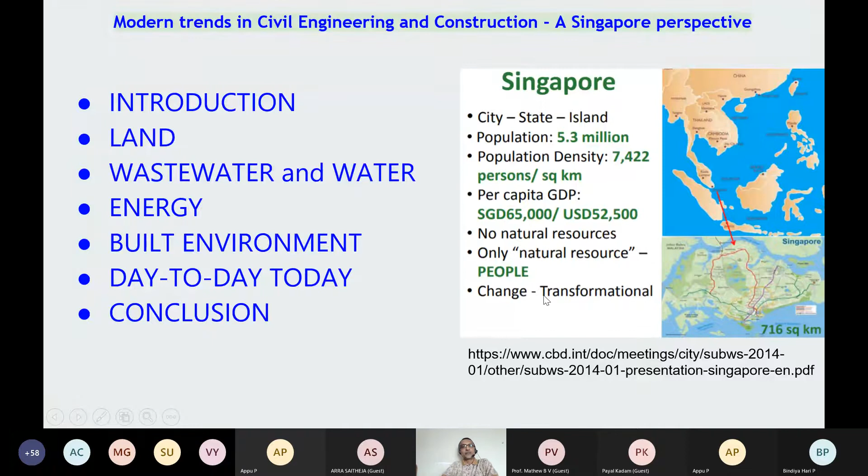You can see a barge coming in. This barge goes inside, it dumps all the waste from the mainland. It is segregated and then it is filled. See here, all these are filled long progressively - somewhere the vegetation is there, it was filled long time ago. Here, the black area is the filling in progress. Later on, this whole landform will be filled, and we don't know whether it will become industrial land, residential land, or a mixed development.

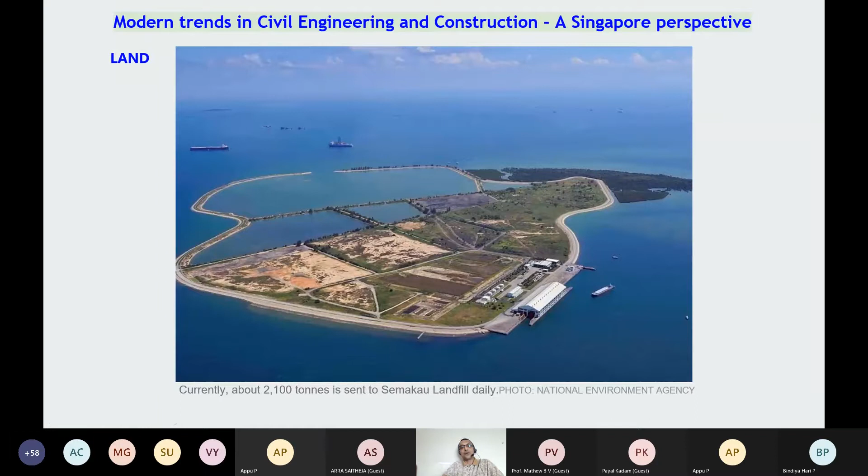That, only time can tell. So, okay, let me browse a little bit of statistics.

This filling was basically done by having very high hills at the center. Very simple: put a belt conveyor, dig the earth onto the conveyor, and fill beside the sea. That continued for long, but now we have different techniques of filling.

Now you can see here, this is one of the recent land reclamation projects, highlighted in blue and red. The blue is already completed, with some construction work going on in the background, and the red is a current contract awarded to a very famous Japanese contractor who is doing the work now.

What he does is shown here: caisson fabrication, 229 numbers. He precasts the caisson on the shore, floats it like a pontoon, brings it and fixes it in this location all around the perimeter. After that, we fill it with sand which comes from some other countries.

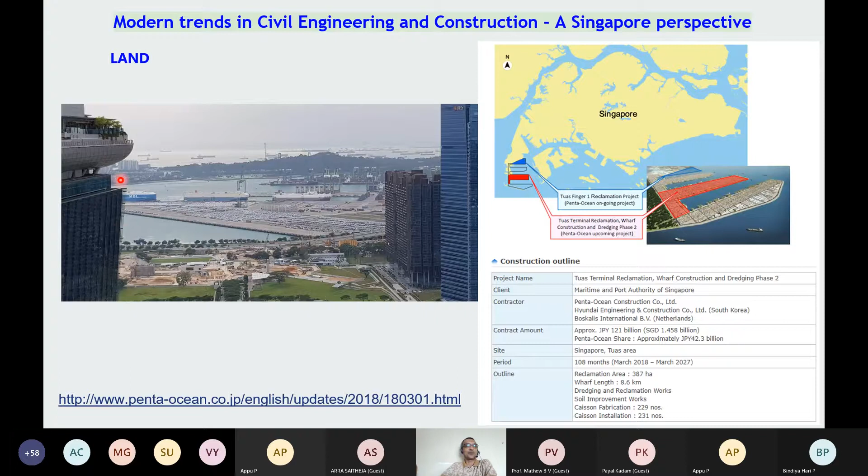This is going to be the Tuas new port, and then the old land will be redeveloped into housing or other real estate, because it's quite near to the Marina Bay Sands, which we saw in the earlier picture. So this is how land is created.

This visual on the left would have been taken about 30 years ago, where the Marina Bay land was being reclaimed. Now see the scenario here - already the Marina Bay Sands hotel is up, the convention center is here, and a lot of development has happened over a span of time.

Even 30-40 years ago, these high-rise buildings were already there, and now there are a few new buildings here. So this is how land is created. You can see here a platform with some green color - this is actually a floating platform where National Day and many other events are hosted. Photo credit goes to Marina Bay Sands, Singapore, taken from the web.

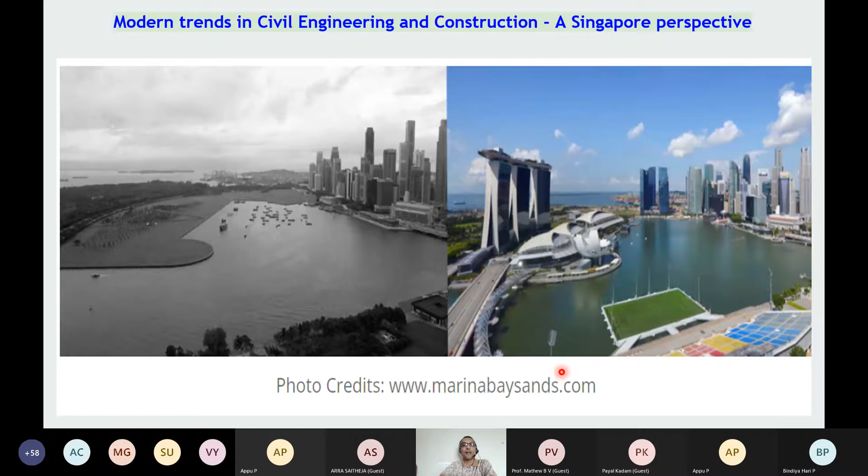So this is the overall concept. Now what I'm trying to establish is land and sea - within that, you're trying to create an ecosystem that is socially, economically, and environmentally viable, which is sustainable.

So here, what you can see is, say now I was trying to explain about the undergrounds, the Marina Bay area. You will see a lot of buildings on top, but you can see this color visualization. The underground space is also highly exploited. All these colors are the commercial developments, and all those are connected by pedestrian links. That means if you're going to build a building here, in order to get planning permission, you have to propose pedestrian links.

Then another thing is the common service tunnel and district cooling. You just note that word; I will explain later. And then car park. All these underground buildings got their own car parks, but they are trying to tell about a dedicated car parking facility. And then in between, you have the Marina Coastal Expressway. This is a mega project, but now it is operational, connecting, going under the bay.

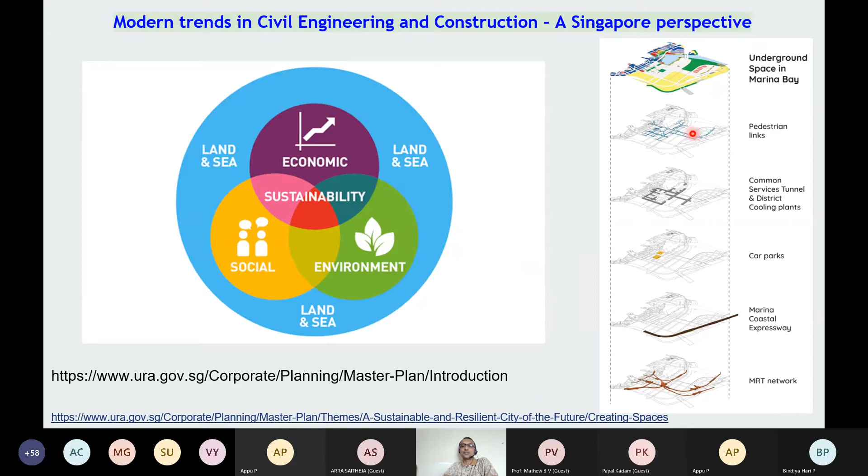And if you see here, you can see a green footprint. On top of part of it, there is some other underground usage also. And you see the amount of MRT network in this reclaimed area is tremendous. So this is what happens when you reclaim land and you already have a master plan. That's why you are able to build a beautiful downtown area there.

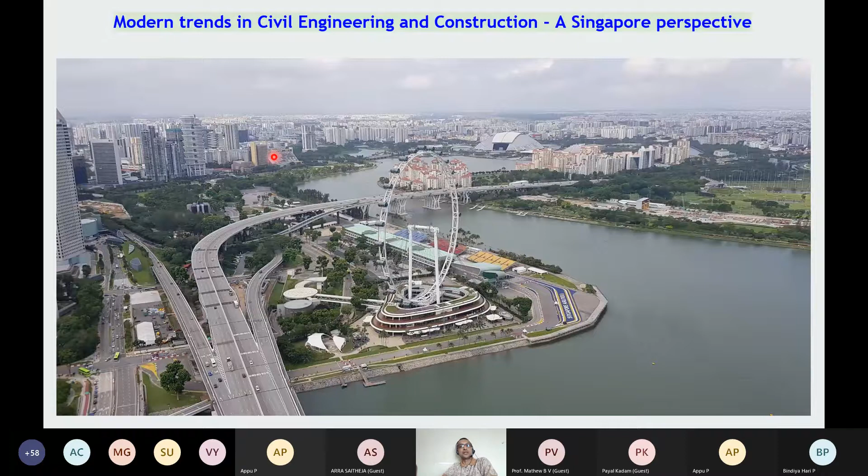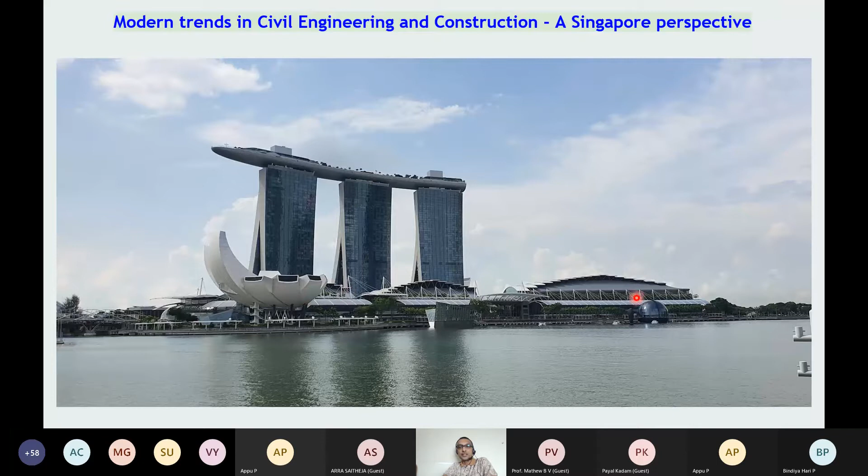This view we saw already, but what I'm trying to highlight is this: an underground railway, a new line being constructed. It will pass under this bay, go across and continue. This is the Marina Bay Sands, the three towers with a pool on top. This is a science discovery center; you can see a dome here. This is the new Apple Experience Center. Actually, this floats in water.

And the city has nightlife as well. This is the city in light. See the illumination. But even for this, there are some criteria. You cannot use any wild colors. Everything is specified. This is again a night view of the Marina Bay Sands and the Theatres on the Bay. So this is the Formula One.

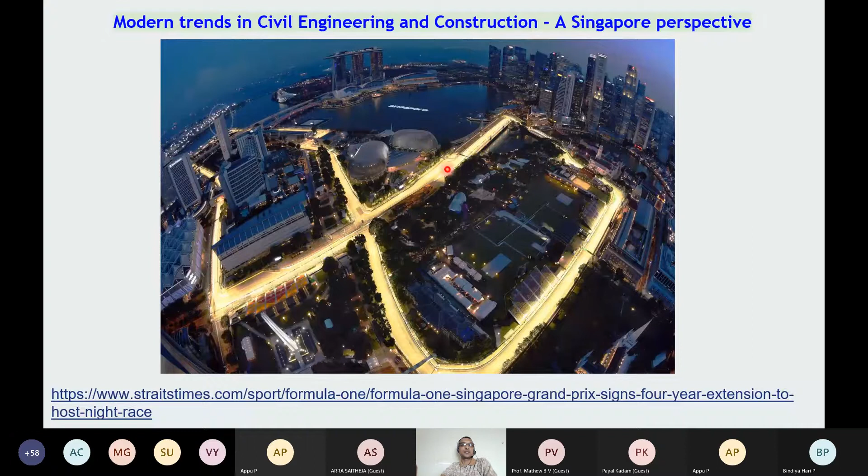Before I showed you the F1 pit building; the night race is going on. The cars are zooming, so that's why you see these lights. This was a fantastic event which was creating a lot of revenue. You wouldn't believe it. Not only the hotels, all these hotels will be fully packed, and then the mobile carriers, the roaming charges generated by this event is tremendous. And this is the Theatres on the Bay.

what I'm trying to highlight is that the F1 pit building was a pit for the Formula One racing, but now it has got an alternative use. Anyone may guess this is where we do the swab test for COVID detection. All the personnel involved in the construction industry have a mandatory bi-weekly COVID test. So this is where we go for the COVID test.

Before I showed you the kayaking. It's not so fun to do kayaking in salt water. So we created a barrier. And this is modeled after, if you have seen the photos of London, London has the Thames Barrier. In a similar way, you have this barrier, which keeps the salt out.

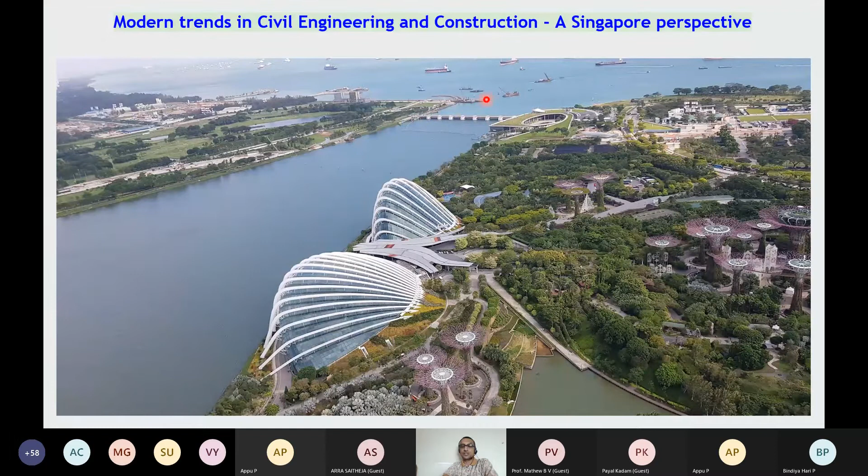So this is again another view. You can see the ships in the sea, you can see the barrage, and here you have some sort of a desalination plant with a green roof. Here the MRT work is going on. Okay, so this is another view of the barrage. Close up. So these are all actually the gates.

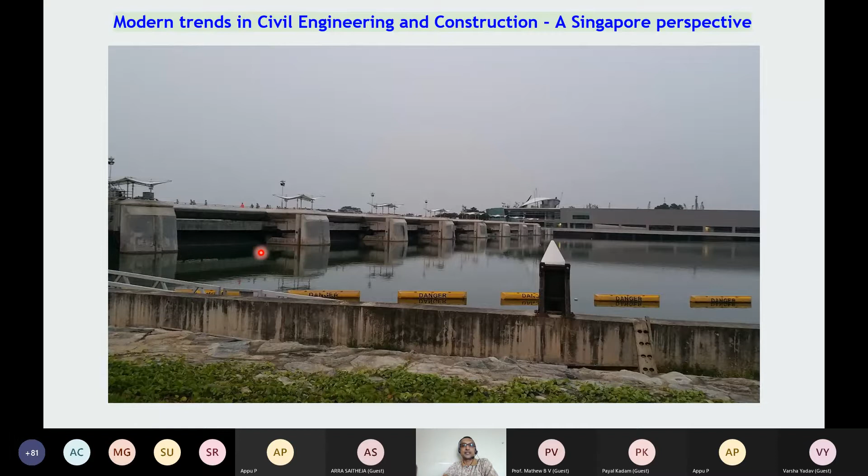Okay, even in other places you have shutters. Mostly it's all steel shutters. But this, I understand, is something like a balloon. It's a rubber kind of inflatable sealing system. Okay. That's why with the good water, you have nice lotus bloom.

But this beauty is not accidental, because there are people going around painstakingly using all these mechanisms, using this boat with a conveyor mechanism to dredge and skim the surface of floating impurities. Likewise, it's not high tech. Similar technologies are used even for cleaning the road and the footpaths. Just a tricycle, not a bicycle, tricycle, and then sweep the road, clean it, put it in the tricycle, take away.

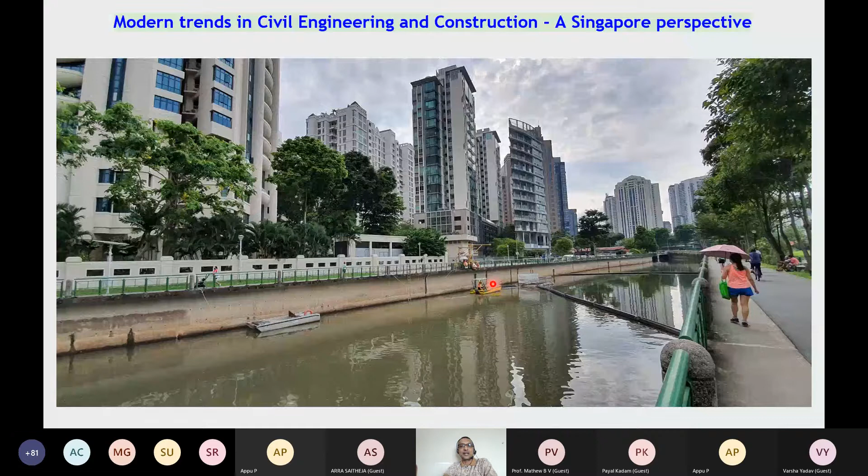So this is some other visuals. You see here you have something like a floating boom, and then here you have two electric powered boats. These are aluminum boats. It goes and cleans the water. So you don't see any dirt because it's already cleaned. The moment the dirt is entrapped here at the boom, this boat picks and transports away the dirt. So this is another view of the boom. Because the flow is in this direction, it gets caught here, entrapped, and then it gets carted away.

And as engineers, just have a look at this detailing. Here you have this railing, and beside this railing, you cannot see, but there is a footpath. At the edge of the footpath, there is something called a drop inlet chamber. From the drop inlet chamber, there is a detailing whereby you have this piping to this outlet.

The pipe is actually nothing but a perforated pipe, and it is wrapped by a geotextile. And within the geotextile, there is the gravel core. That means the water percolates through the geotextile, enters the pipe sleeve, and then goes into the drain, into the water.

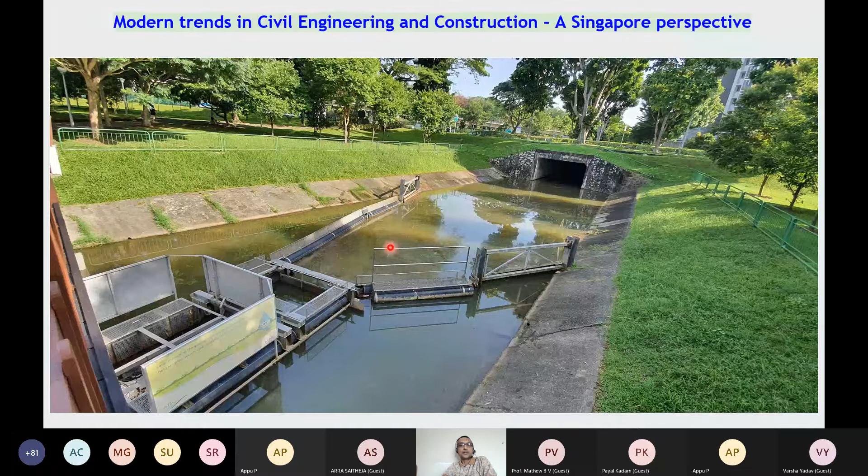Okay, so this is another view of the drain cleaning. You see what happened. The previous day it rained, so the dirt was all cleaned away. But still there is a contract for cleaning this drain. So nobody can relax. The contractor brings a lorry crane, he hoists down a bobcat, and this bobcat will again go and sweep this drain. Because during low flow weather, only this invert portion of the drain will be filled.

So this will always remain dry. So if at all any silt collects here, this Bobcat will clear it and take it away. Why? Because this silt would go into the bay I showed you. Once it is silted, dredging will be very difficult. So you de-silt it up front. Okay, so that's the principle.

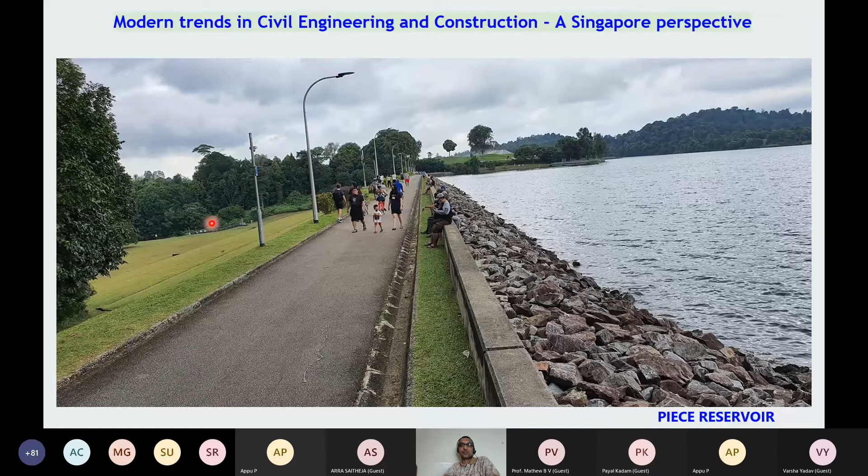And then downstream, I don't have a photo; I forgot to put it. Downstream you can see yet another reservoir, the Lower Pierce Reservoir. This is also fresh water. All this water we use for drinking.

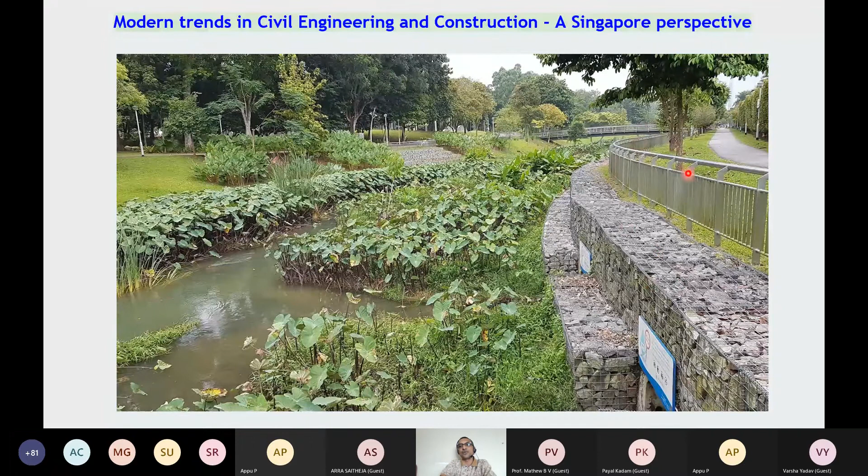So now this is actually an old river or water flowing path. You can see a lot of plants here. These would be called weeds in any other part of the world, and here they are also called weeds. So this is not actually landscape, it's weedscape. And you can see all these gabions, a very practical way of side protection. This is where all these drains are engineered properly. The water flows through all these catchment areas.

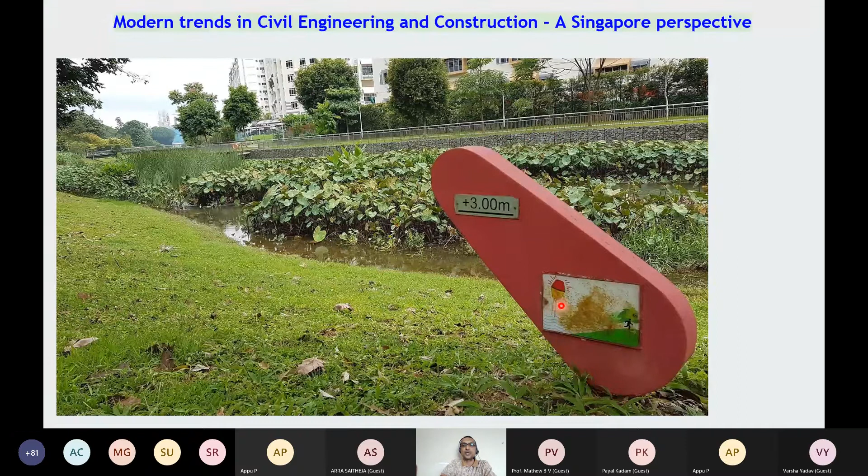And what I'm trying to say is, now people can walk, but during monsoon time it will flood. See here, you can see the flood marks. It can flood until here, but still it will be just beside here. So there's a warning, and somewhere there is a beacon telling about the upcoming flood. That's how you try to beautify the area and prevent floods from inundating your areas. And all these are based purely on engineering calculations and predictions based on computer simulation.

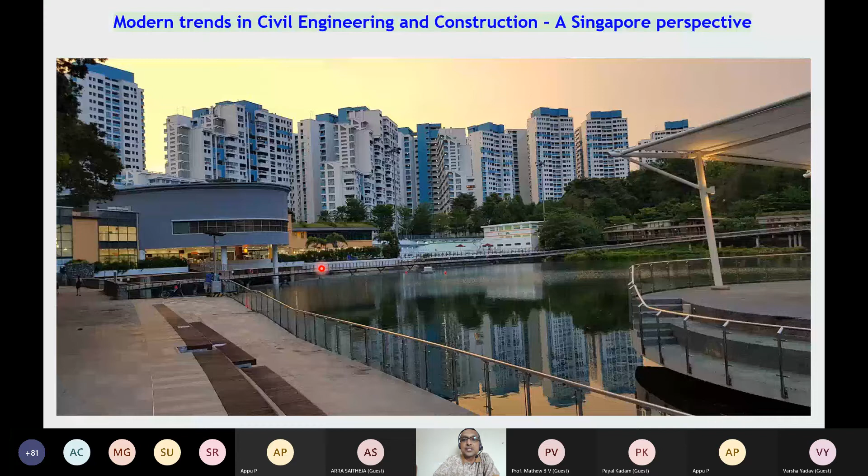Yeah, and here, this is a community swimming pool. You can see the gallery here, and the pool is here. And I think the water is taken from this, then there's a treatment plant, and then it's used in this pool. And now I'm going closer to this community center.

Now, what I'm trying to tell you is this building sits on legs, and this water flows under this building. This building belongs to the People's Association. This pond belongs to the Public Utilities Board. And there is coordination between these bodies to allow this water to go under the building to the other side.

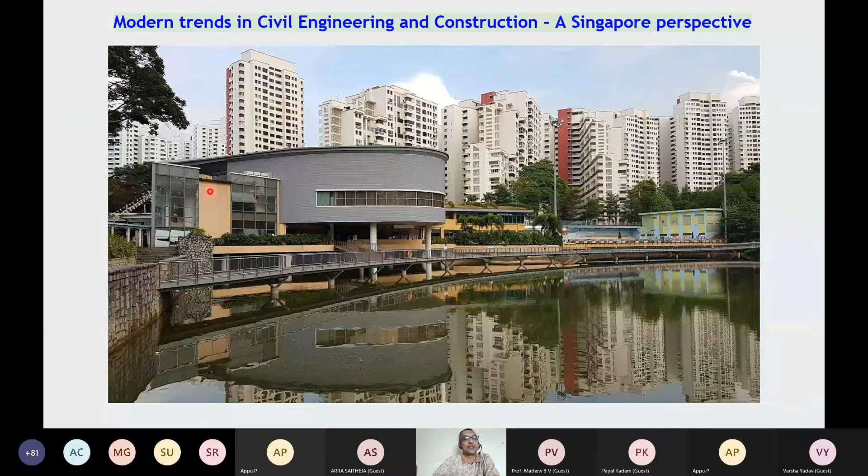See, there is this big water impounding reservoir, and this is a pier. And see, below the building is dry because this is the holding capacity of this reservoir. And see how this column is detailed. I'm sure there is some science to it. The bottom is a bit narrow, the top is a bit wider. So it's a combination of hydrodynamics and structural engineering.

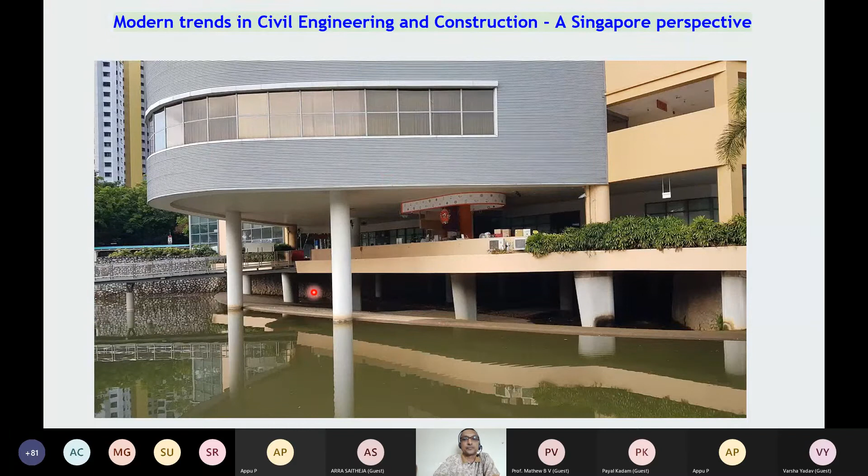Okay, so now I'm taking you upstream. The water is contributed by this drain. This wall is there, and on the right side is the road. This is a gravity wall, and this is a bridge, a very nice bridge. And here there's a slope. There you can see the invert, and a very small cascade. And this is some sort of a boom for catching the debris. So people will go there, use a net and clean the drain.

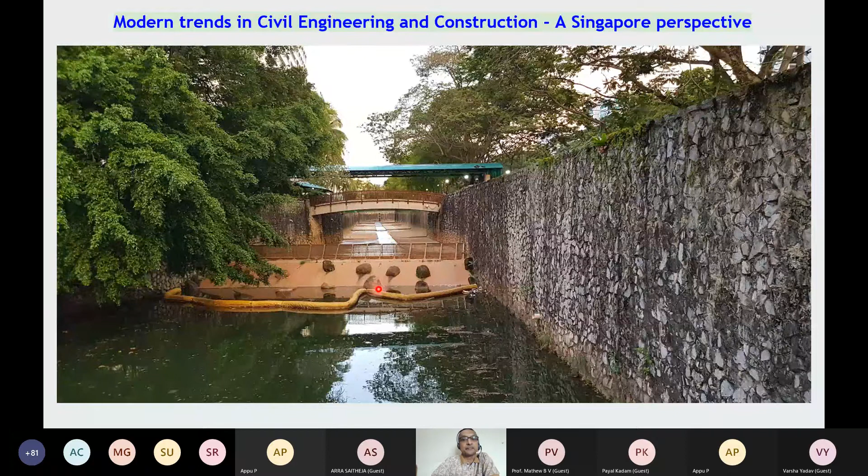Okay, so we are taking you upstream. Now you see the detailing. These drains were done during different periods of time. This drain is at a lower invert, and you can see a separation here, and you can see the gabion walls here. So the catchment of this drain is somewhere else, and again there is another small drain here. So all this is based on some planning and planning permission. That's what I'm trying to illustrate. But you see the quality of water.

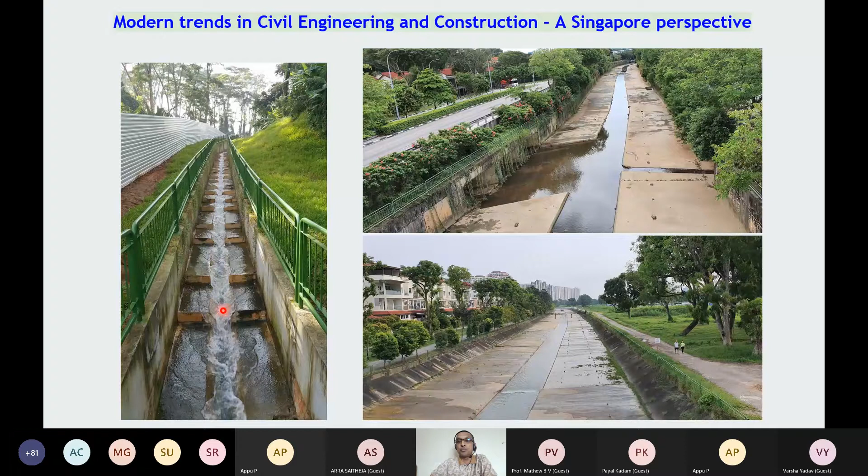You can see the feeder lines, and then I talked about the concept of the drop inlet chamber. So see, the water is not flowing from the surface. It just flows from the subsoil, the subterranean pipes. Okay, and then you see these cascades. These cascades are all engineered and constructed, not just based on any ballpark or just a mason deciding how to do it. Okay, so this is another drain.

So again, this illustrates the concept of ABC: active, beautiful, clean. See, so this is a park connector network. See, people are jogging, and I think this is also another jogging track. These park connector networks cannot be seen on Google Maps, because Google doesn't map this, but you can see it in the NParks park connector network. Also you can see this lamppost looks different, because this is under the park connector. This is, I think, under the town council.

Okay, so now this is how all this is happening. This is the PUB, Public Utilities Board's website, Singapore's National Water Agency. It has got various functions. This is only just one of the functions. Actually, PUB controls water and sewer. So about ABC Waters: see, design guidelines, certification, ABC Waters professional.

See, just now we saw all this detailing. Any engineer cannot go and design this. Even I am not allowed to do this. In order for you to do this, you have to do a course on ABC Waters professional. Then you have to do a few modules. It's not so easy. Then you do this course, you pass. Then they will allow you to do the design.

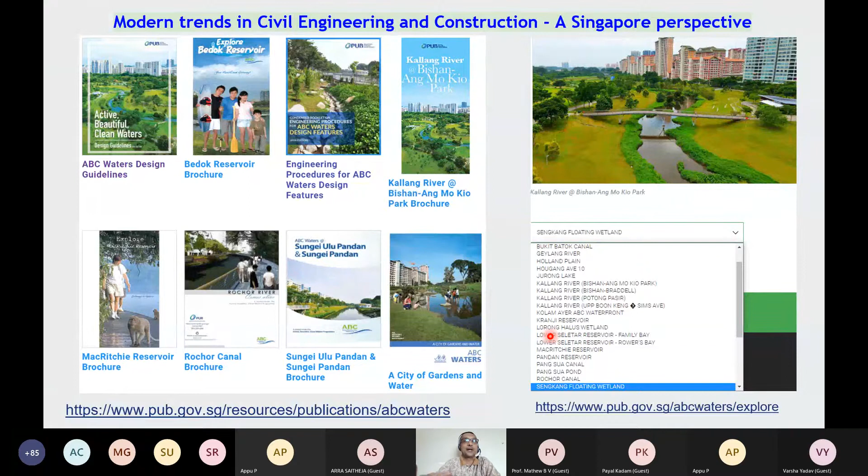Okay, so again, water. Now we saw the water from the local catchment, but that is only a small contribution. Singapore relies a lot on imported water. And in a moment, I'm going to introduce you to the concept of NEWater. NEWater is nothing but old water, but recycled. And there is desalinated water.

Okay. Now, we talked about imported water. So this is where we get the imported water from Malaysia, because Singapore is a small dot on the map and it is just below Malaysia. We have put pipelines.

You all must note Singapore's main water source is imported water from Malaysia. But having said that, we are trying to get self-reliance from water, from other sources - water catchment, NEWater, and desalination water, so that we will rely less on imported water.

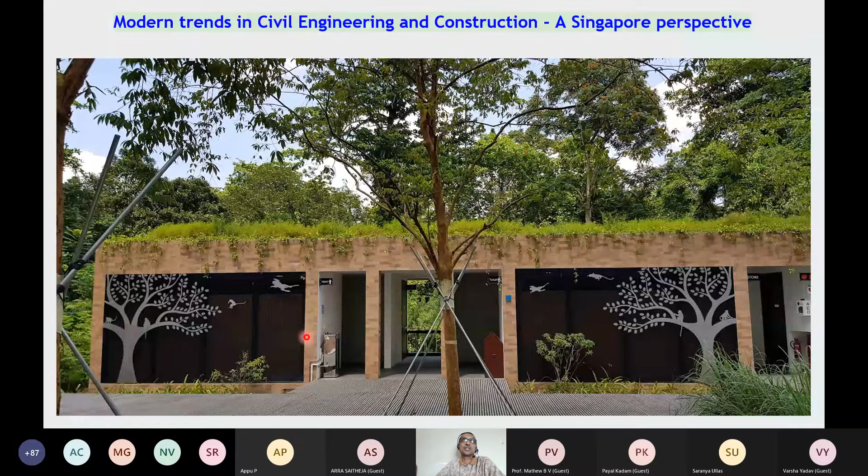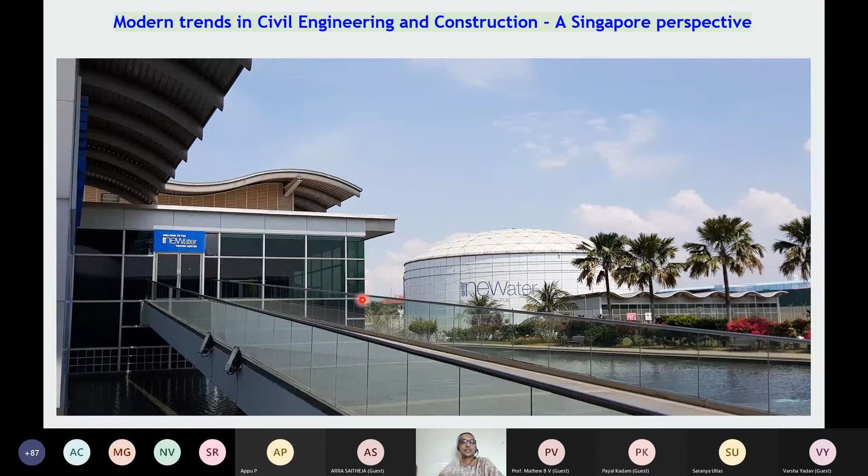That is NEWater - this is a NEWater pilot plant, a very small plant near Changi airport. Inside the pilot plant, you go and see how they showcase the process: the microfiltration system, then the SCADA, the UV disinfection, and then there's a gallery where children can go and learn all the stages of the treatment.

So this is an infographic of the untreated water - see, this is either the industry or the house. Then you go to the untreated water, it gets treated - microfiltration, UV disinfection, all the stages - and becomes NEWater. This is the website - next time when you come to Singapore, you can find time to book this online and pay a visit to this NEWater centre.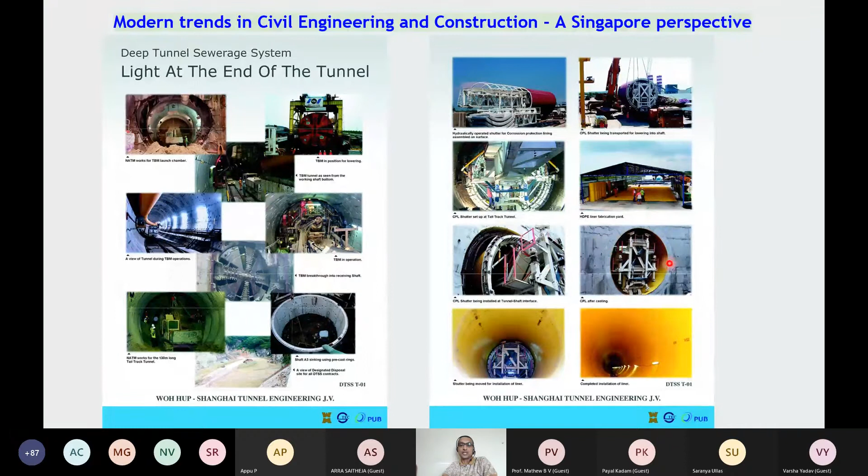So this is the overview of the DTSS - this was my package from A to B, the last package. This is where all the reclamation is going on, as in my first few slides. This is the deep tunnel sewer system, and this was my package here - this one I explained.

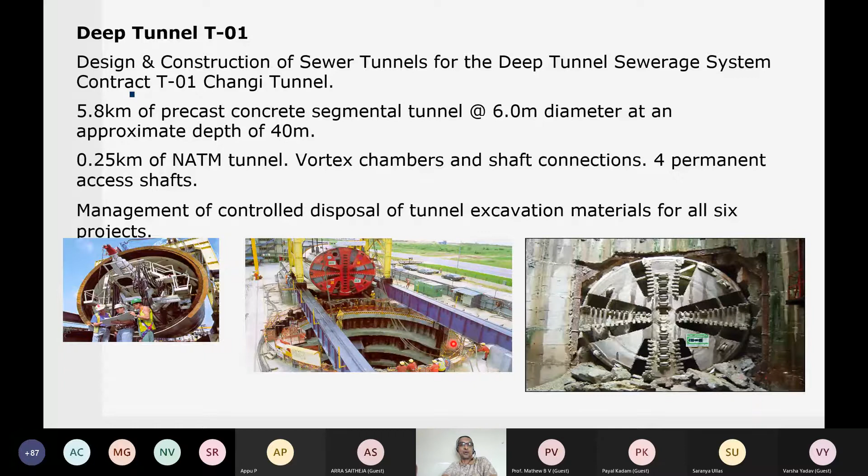The feature of this project was this TBM was lowered as a single piece. It's a 350 ton piece lowered by heavy lift, and this is the breakthrough of the tunnel boring machine. Anyway, I'm not trying to dwell on this.

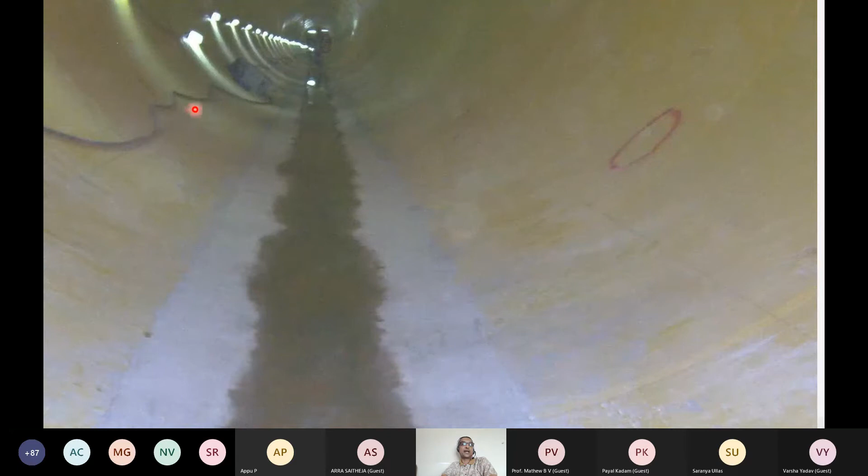The tunneling was finished. After that, we have to install this 6-meter diameter tunnel and put this corrosion protection lining in place. Then the sewer later runs through this. The invert is not lined. The idea behind that is when the tunnel is running, it will be running at least half full, so the H2S will not be exposed there. This concrete will not be exposed to the hydrogen sulfide. Only this liner gets exposure. So this is the corrosion protection liner shutter, which goes inside the tunnel. This is a mock-up, and then it does the work inside.

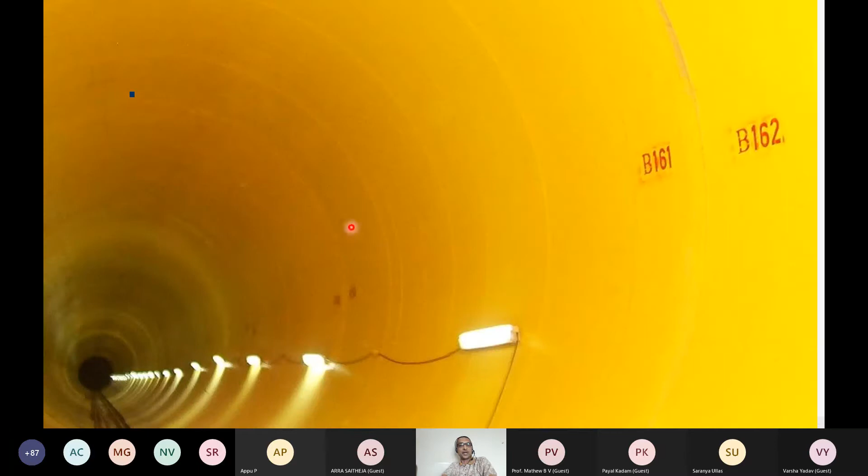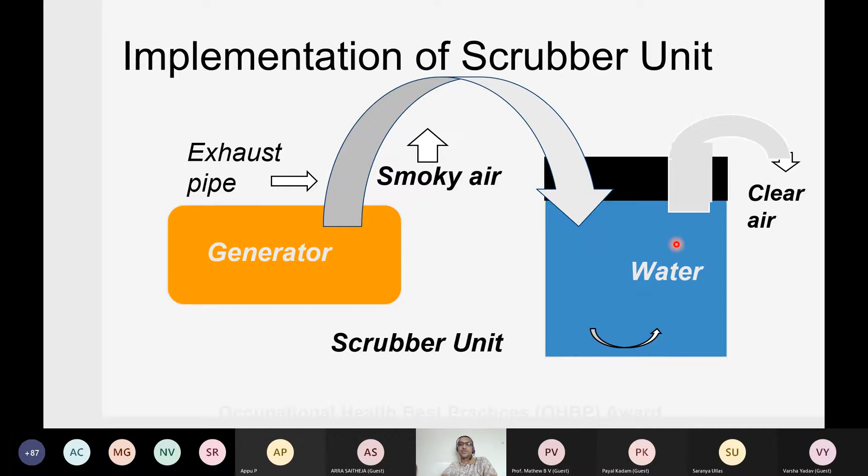Now, what I'm trying to showcase here is the machines inside the tunnel emit smoke. I'm just trying to show a simple method how we eliminated the impact of smoke inside the tunnel while working. So this is a generator. It creates smoke from the exhaust. We channel it through the water. The water acts as a scrubber, and then clean air comes out. So what we did is just took a 200-liter drum and made some improvisation like this. This is how it works inside the tunnel.

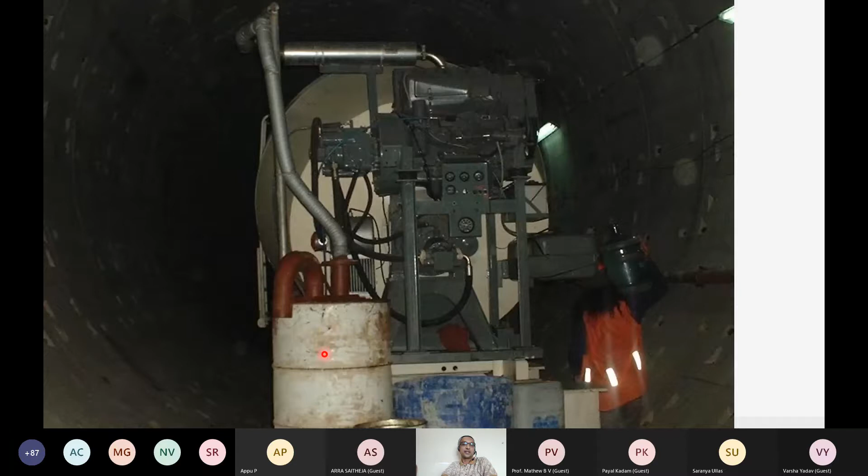And then this is the machine. This is actually a mixer car, a concrete mixer. The mixer works from this engine, and the exhaust comes through this pipe through here. The water's in the drum, it goes away. So then again for this generator, the generator also works underground, and we had this improvisation. This is one example I'm just sharing from the project. So if next time you have a project somewhere with a generator working and there's smoke pollution, you can try this.

If you're so interested in the chemistry of this, I've got many charts. You can privately email me, I can share with you, no problem. But I don't want to dwell on that.

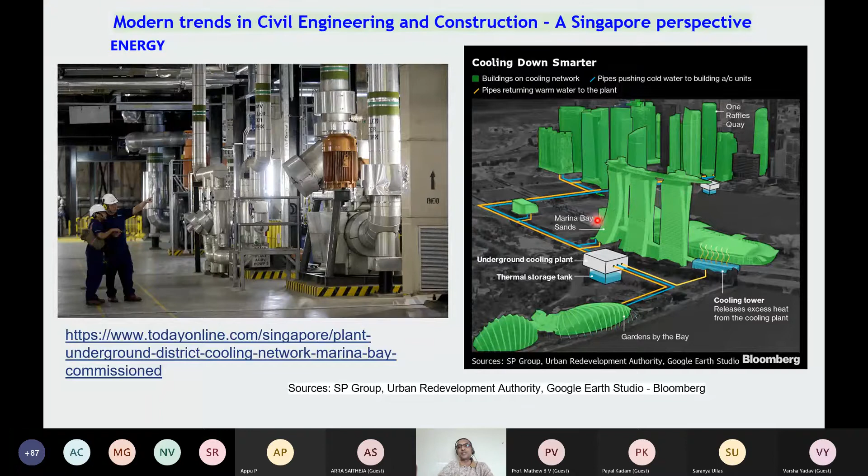District cooling, two innovations to note here: one is the common service tunnel, the advanced services tunnel. Second is the district cooling. So the beautiful buildings I showed you upfront, almost 50-60% of those buildings, all these green highlighted buildings, benefit from this district cooling. So we are talking about energy, right? Now in that regard, we talk about solar power. This is a very recent development, floating solar power.

Recently, a 60 megawatt floating power platform was commissioned. Earlier on, there were many projects covering almost 50-60% of all building roofs, including HDB. I told you 80% of the people live in HDB, and the HDB roofs are solar enabled. Now we are going to do it on floating water, because floating water means there is no shading - it's all open. We are also doing a pilot project for this floating platform in our neighboring country of Batam, and from there we are going to do underground cabling to power Singapore.

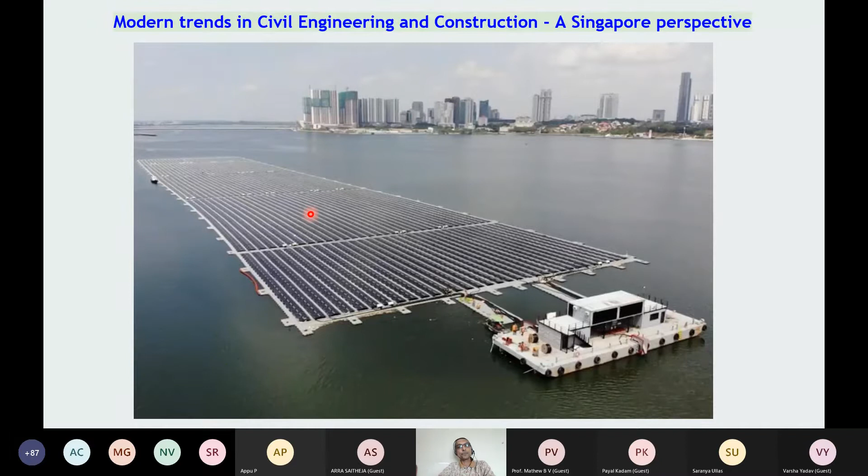So now we may ask, why so much power? You need it for factories and residences, but we should not forget that power demand is going to increase exponentially. Why? I was reading through history. In the late 1800s there were horse-driven carts, and the pollution was due to the manure - to put it bluntly, the horses used to shit on roads. That was unbearable. At the peak, even horses used to die on the roads and the carcasses used to lie around, creating pollution. That was overcome by gasoline vehicles, and now we are trying to mitigate pollution by electric vehicles.

So this is the Blue SG initiative. Actually, to put it bluntly, Singapore is a bit behind in implementing electric cars - the license for electric cars came only very recently. The Tesla, the new car, was launched only a few weeks ago; I never went and had a look. But these Blue SG cars, these sharing cars, have been around for maybe a couple of years.

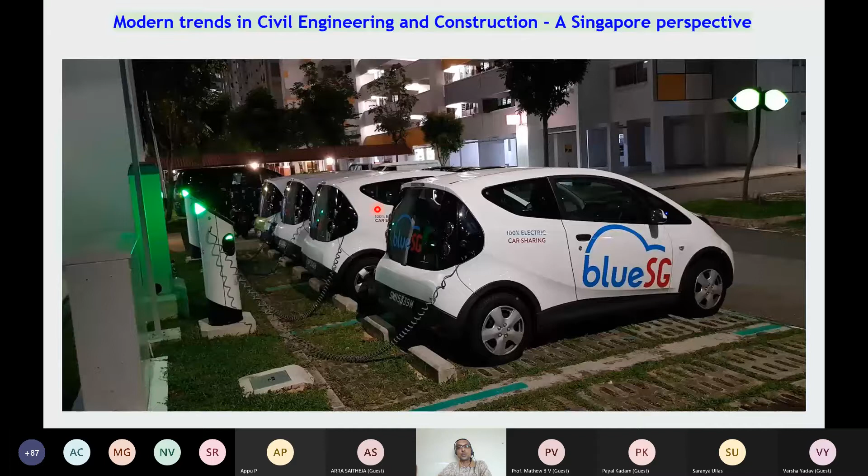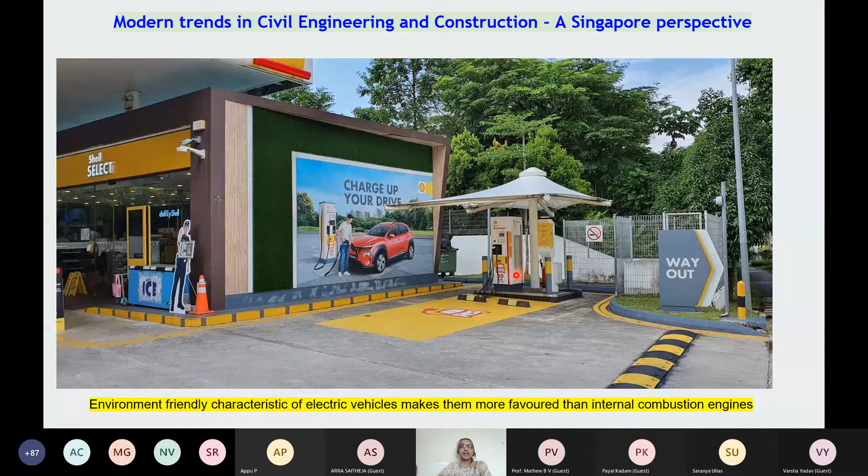Now see, this is the irony, this is the dilemma, this is the paradox. This is a Shell petrol station - he's selling petrol, there are a few booths selling petrol, but now he's selling electricity also. When you go here, he can charge your car. He says fill up your car, he says charge your car. And I forgot, I have another photo - there is another station offering you to fill your bicycle, meaning fill your bicycle with air. That's my favorite photo, it's near my house, but I forgot to put the photo here.

So we spoke about land, water, energy. Now let's talk about the built environment. Let's see how we are on time - okay, almost 1 hour, fine, I'll quickly run through this.

This is one of my housing projects, which I did way back in 1997 - 3 towers, 2 basements, multi-story car park. It is called Heritage View Condominium. This was a conventional construction; the architect and engineer gave us a normal beam and slab design. But what we did is we converted it into a post-tension flat slab so that it is amenable to flying table construction.

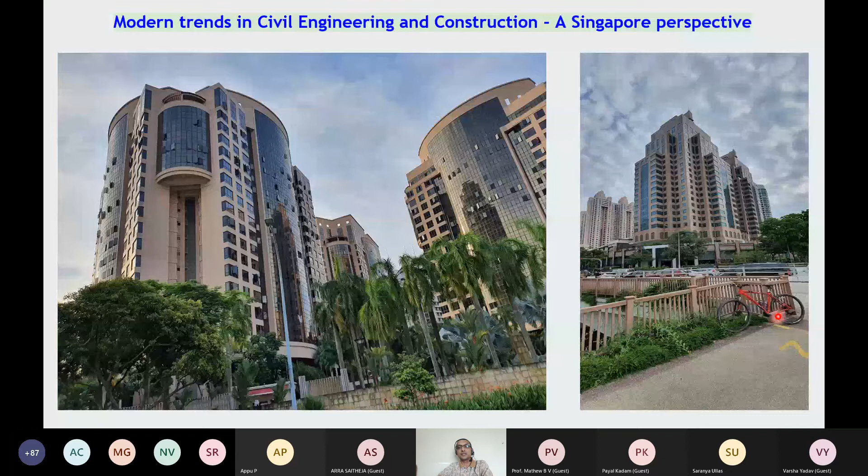This is one of my projects during my early days, 1993. Yeah, my cycle is here. Okay, I did this tower. Okay, anyway, this is beside the point.

So now what is the alternative? It is precast or PPVC. Because now I told you this was all done ages ago. So this is old school. But now the new technique is bring my bedroom in a truck. That's what's happening. See, this truck is bringing my bedroom. It is coming from Malaysia. See, it is built under this factory condition. Factory condition means what? Very close monitoring of quality. Then you bring it in a truck and deliver it, lift it, and then hoist into position.

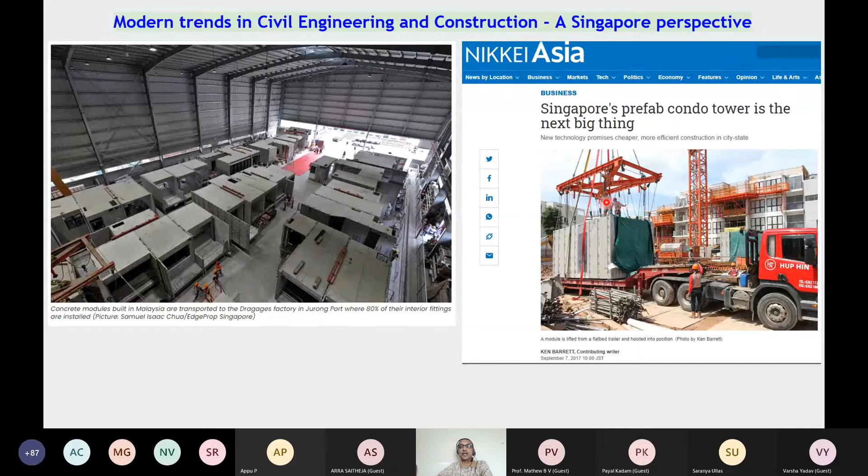But it is not simple and straightforward. Okay. The construction part, first you have to cast the bed, then the wall. But more than that, it also involves a lot of design thinking about the lifting. The whole frame should be designed for lifting. And then the lifting lug should be designed so that the lifting point will not fail. And all this, the lifting frame, everything, a lot of engineering is involved. See, so once it is coming to site, it is hoisted up and put into position.

See, and then this is PPVC. That means even the window and probably the tiling, bathroom unit, and the bathtub, everything is in place, is lifted, hoisted, and put in place. And then the only thing, the lift core. You can see the lift core goes up ahead, using some jump form or something. And I believe this shear wall, the end wall, I think is in situ. That's why you can see a climb formwork here.

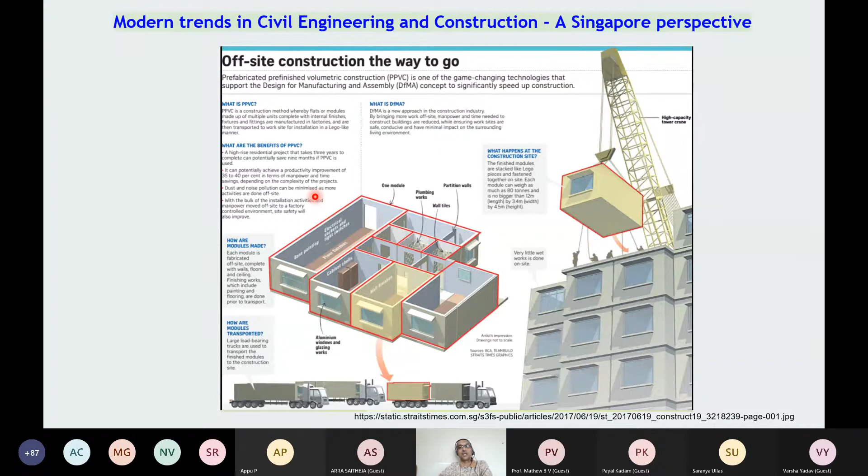Okay, so anyway, to study this whole PPVC alone will involve a lot of seminars, but I can show you the way where you can study this and draw inspiration, then you can teach, or you can ask the students to study more or do research. So okay, off-site construction, the way to go. They also talk about DFMA, design for manufacturing and assembly. That means they're also including some computer aided simulation and what not.

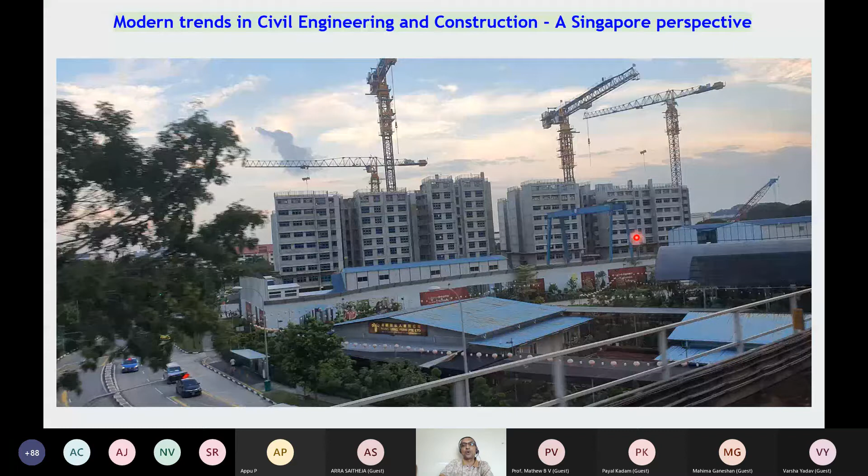And then here you got a gantry crane. Why you have a gantry crane? Because the trailer brings and then the gantry crane unloads and places it in position. And then see here, these are all completed blocks. How can you tell they're completed blocks? Because the top is different, because of the water tank, the structure looks different. It's all typical, and the top is different because of the water tank. But here you see, still under construction. And this is the workers' quarters. Later, once it's finished, the workers' quarters go away, and then here you'll make a school or some other facility for all these HDB flats.

This one, Housing Development Board of Singapore. And there are many links in this, they are quite open. So you can do your research from this website. I don't want to dwell into this. Same way, this is Housing Development Board for the housing board flats. This will be more relevant for Indian mass construction. But for the PPVC, for the private projects, you can go to this Building and Construction Authority

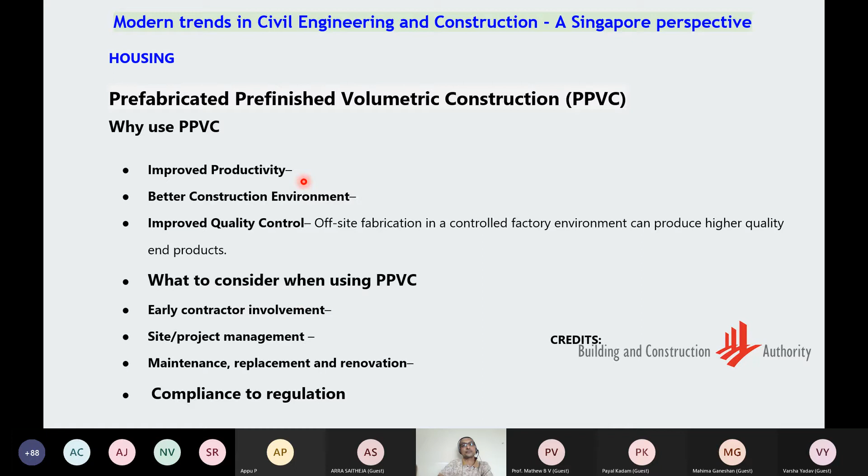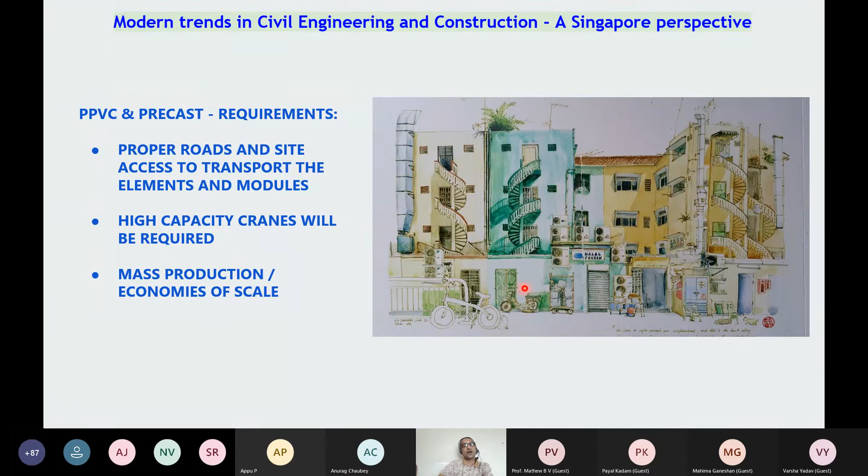project if you want more information. Okay. So to summarize on this: proper roads and site access to transport the modules, high capacity cranes, and mass production for economies of scale. Okay. So now I just touch on, okay, the country is building up a lot, but still we focus on conservation.

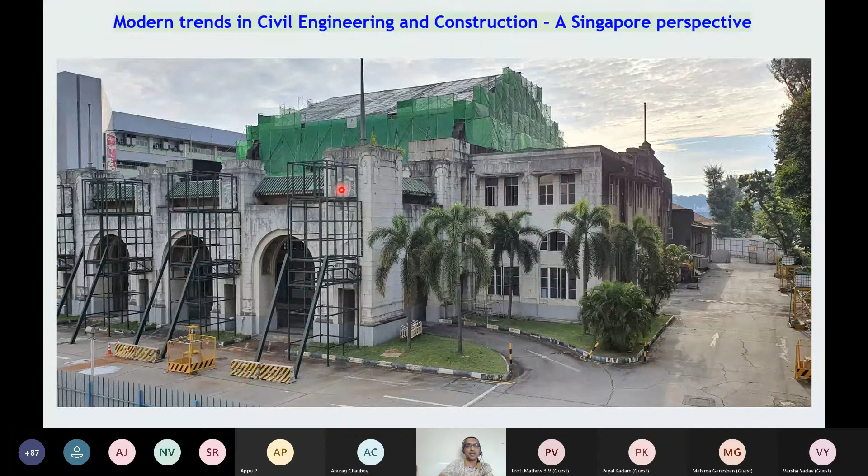Okay, see, it's conservation. So here, near this is an abandoned terminal. Before, the train from Malaysia used to run through this terminal. Now the train is stopped. So this is being converted as an underground railway terminal. And then see how this is being conserved. Once this is conserved, it will become like this.

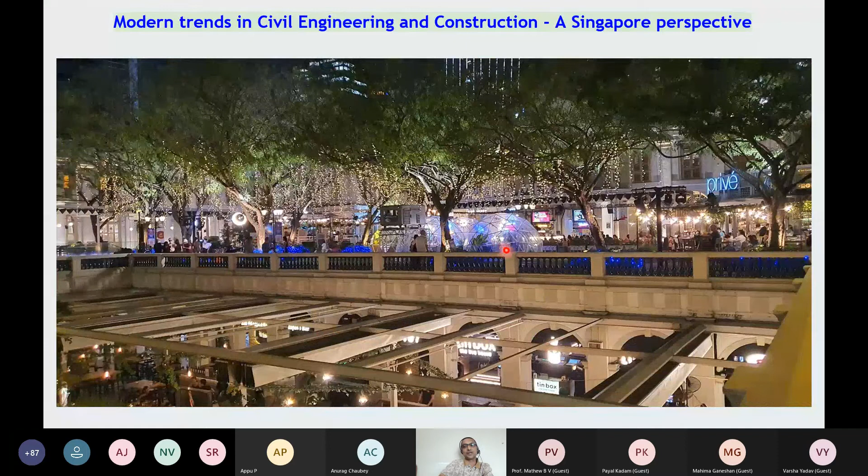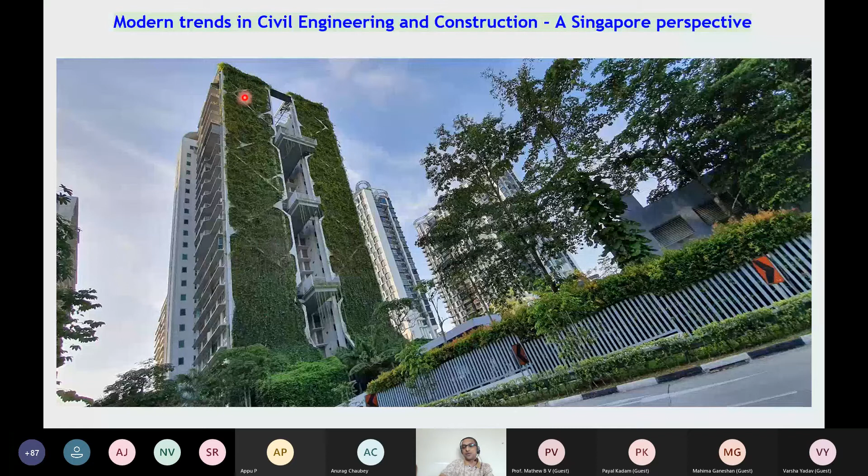This is my favorite, one of the favorite buildings in Singapore. So what I'm trying to say is you are not alone, but then there should be a vision to do this. Somebody had a vision. Everybody has got a vision. You have to do it. But then how this vision is created is through this coordinating agency called National Parks Board. See, it is not only because all these people like to go and do this. This is also due to certain regulatory requirements. So that is coordinated by National Parks Board.

So see, these are all different. Please go to these websites. You can learn a lot of things, these are the different trails. That means you go to these trails, then you can see which buildings have all these features. And not only that, what I'm trying to highlight is, this is a very old tree, near my house, 100 years old or something. This branch is weak. So NParks go and prop it. They do a structural analysis, find out what is the appropriate foundation, and they prop it.

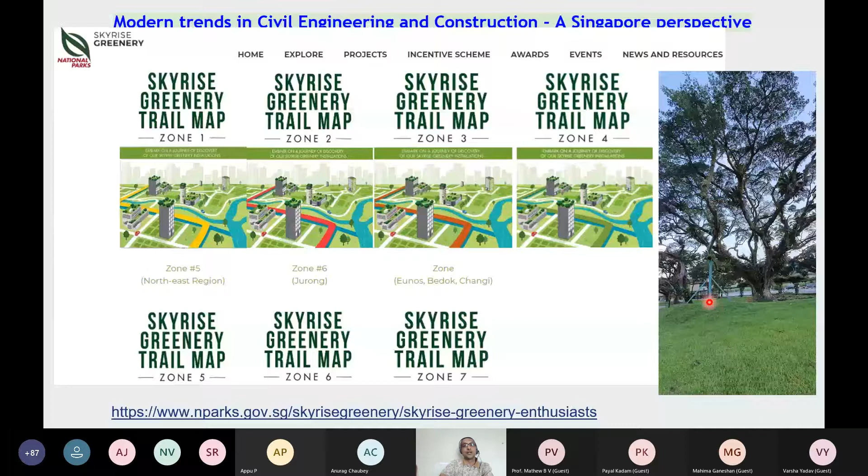Okay, so if you go to this map, you can see all these, and then coincidentally, I took a photo and I see, this is the same, even nice fences. And also almost all the trees on this island are mapped. And these trees, anybody can go and map. See, it says, go and plot a tree.

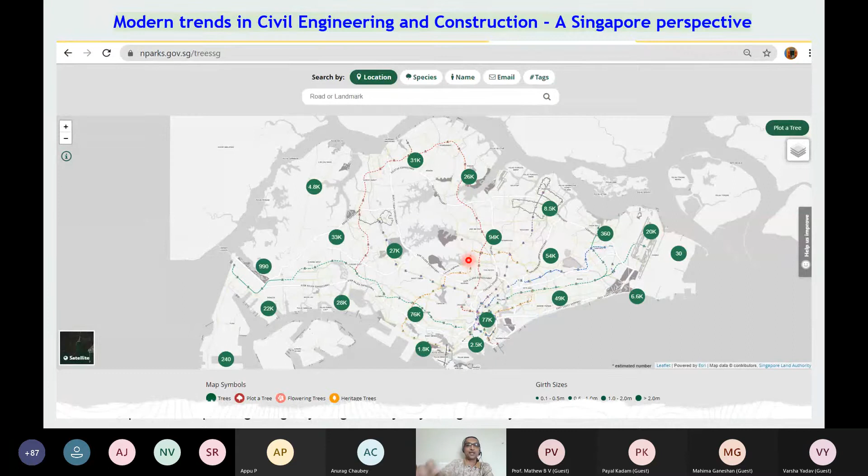My daughter also plotted trees as a school project. But when you plot, they'll review. If it's correct, they accept it and put it in the map. But now people are very fast in plotting. I think almost all trees are plotted as and when they grow. Okay, so again, there's a vision, city in a garden, how many parks and gardens, park connectors, the greening paying off, before and now, the Marina Bay, how it was realized, the airport relocated.

The airport was in a place called Paya Lebar, and now it is where we see now. The Jurong Island was relocated; now it is all something else, the bustling hubs.

Okay, so now another interesting feature, the rail corridor. I told you about the abandoned railway station. A train used to come from Malaysia through the causeway, which used to bring the water, to the place where I told you, the abandoned railway station. The train is gone, but still we never stopped using it.

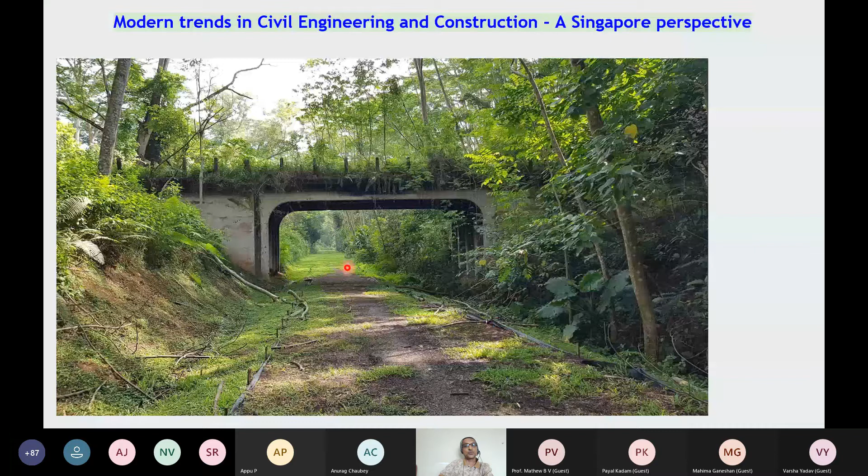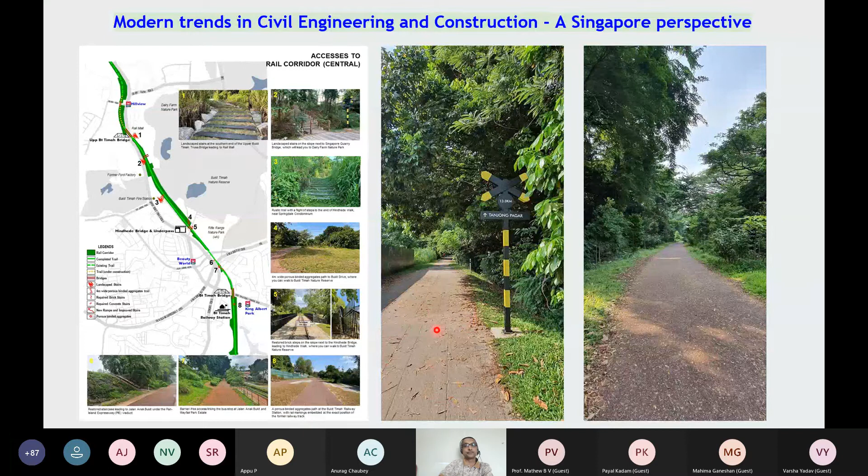See, this was taken when the train went. Now it looks like this, it's all green. This same place I used to go for bicycle rides, and now it has become like this. This is called the green corridor. And then there is even a map showcasing all that. You can see the old tracks, and then they put some pervious kind of overlay so that people can ride the bicycle. So that track stretch is finished.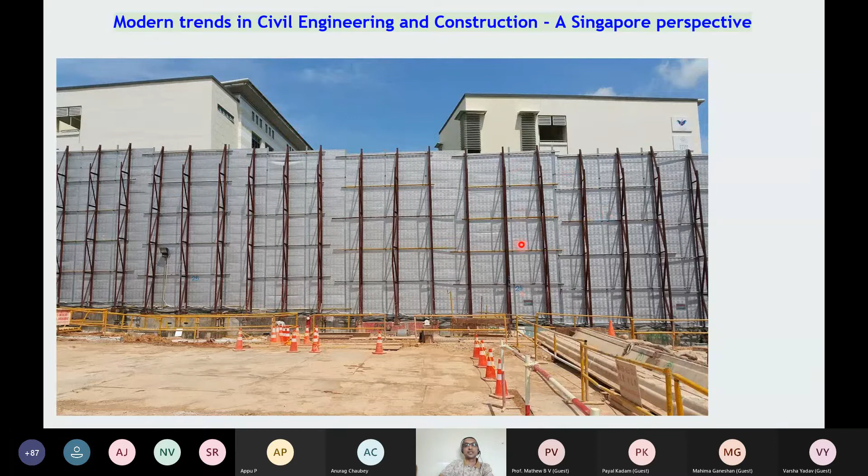Okay, so now before I run out of time, I'll quickly brush through. What is this? I've taken this photo from a construction site, and this is a school. So what you see is a noise barrier. This is a very special noise resistant material we have to erect so that the sound of the construction machinery does not go to the school. This was taken before, because they have to inspect, then only they will give permission to work. They gave the permission, the cranes are here, the boring rig, the diaphragm wall machine is here. Even at the housing board, everywhere you have to put this. Then there's real-time noise monitoring. If the noise level exceeds, they will come and stop your work.

Okay, so here the construction is going on. See, but the water is clean. Here also the construction is going on, the water is clean. See here also, you have to put the visual screening. That means from outside, you should not be able to see anything.

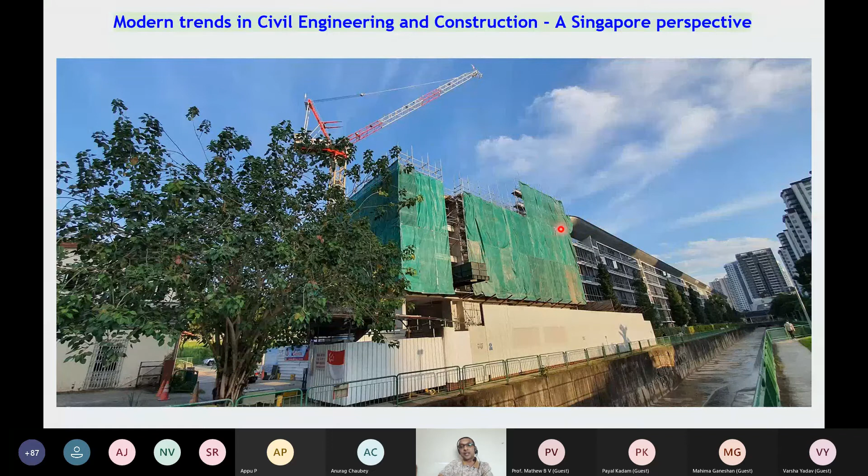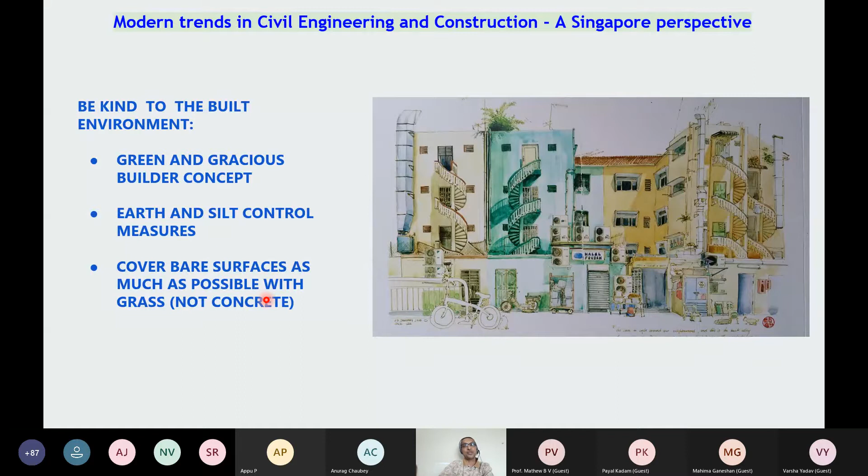So what I'm trying to say is the green and gracious builder concept. Earth and silt control measures so that you don't silt any public drains. The main important concept is cover bare surfaces as much as possible with grass, not concrete. That means you put either cow grass or buffalo grass or something. Then you mow it. It will grow very fast. No need to do close turfing, just spot turfing. Grass will grow fast.

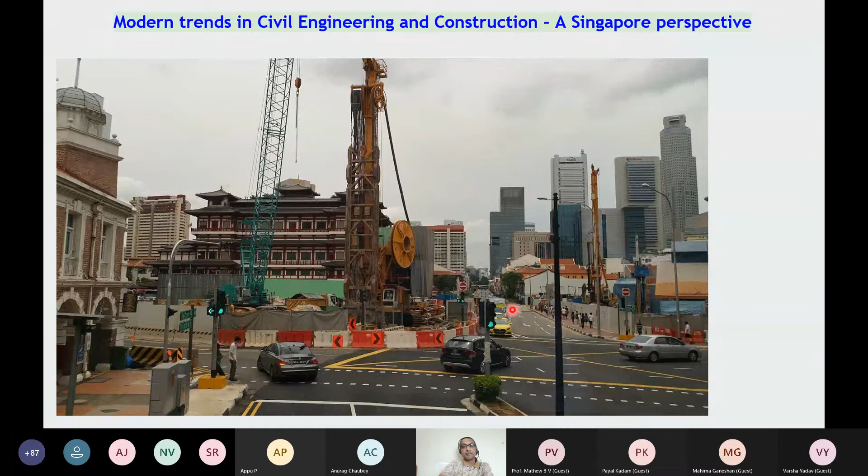See, this road diversion is called one-to-one lane replacement. That means if you've got 3 lanes here, we'll replace accordingly. Put the lane marking, everything. See, there's a very old building. Okay, and see, very neat and clean.

And then I spoke about the drop inlet chamber. See, the drop inlet chambers are still maintained. That means the water comes here, it flows inside and goes to the drain. It doesn't go over the footpath. And see, the D-wall machine is busy here.

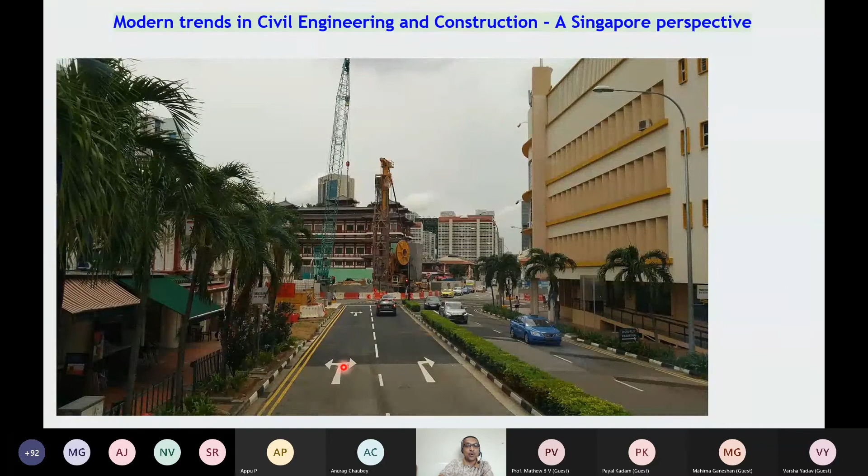And then next is standard details of road elements. That means each road element, the length of this arrow, the point, the length of this black and white, and the height of this tree, all these are based on the standard SDRE. We just say: follow SDRE, based on the Land Transport Authority. Also downloadable.

What I'm trying to say is, you need not follow this as a Bible, but later on, if you are building a house or developing something near an existing railway system, you can see what the foreseeable risks are and how you can overcome them.

So now I spoke about many agencies, but why all these things happen is because of another scheme, Green Mark certification. Green Mark evaluates the environmental performance of buildings in Singapore. This is very important. Go to the certification website, and you can see a lot of things, how this is happening, why this is happening. There is a wealth of knowledge there.

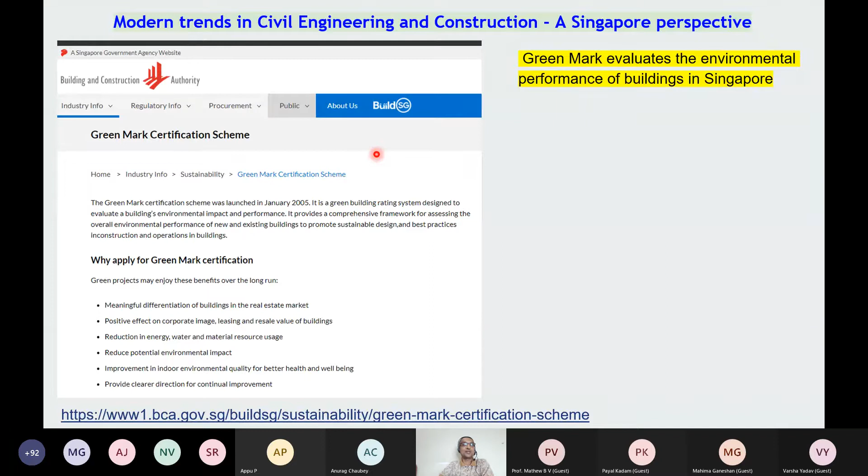I think I've run out of time, otherwise I wanted to run through the website. But anyway, I'm not going there now.

So now, the metro system. Even India also has a metro. And proudly I can say that the Kochi metro is exactly the same Alstom loco which is running on the Singapore Northeast line.

750 volts, from the third conductor, and it's also got an automatic system. But now I think they run on override. But if it is automatic, then what's the advantage? Okay, see this train here. It is running on 1 minute, 1 minute, 3 minutes. See, the next train is 1 minute. After that, 3 minutes, 5 minutes. So 2 minutes interval. This is because of automation.

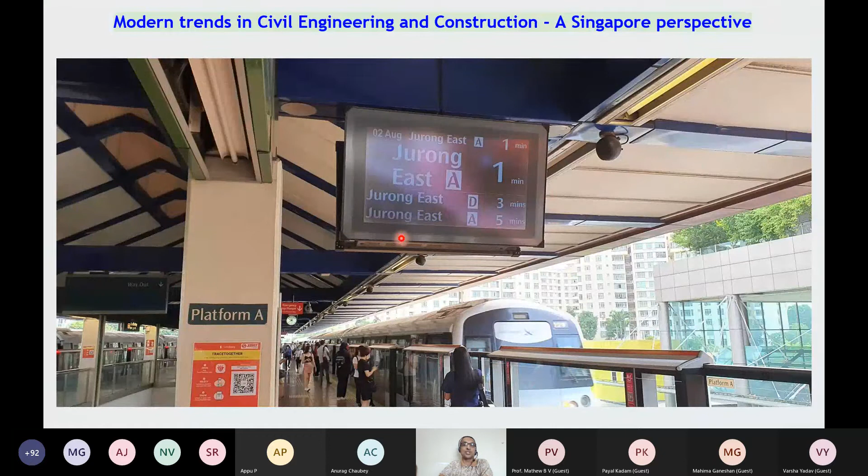And plus here you can see one difference: here there is no platform screen door, but here you've got a platform screen door. So what I'm trying to focus on in this picture is automation, even in building and building interfacing. So automation is not alone there.

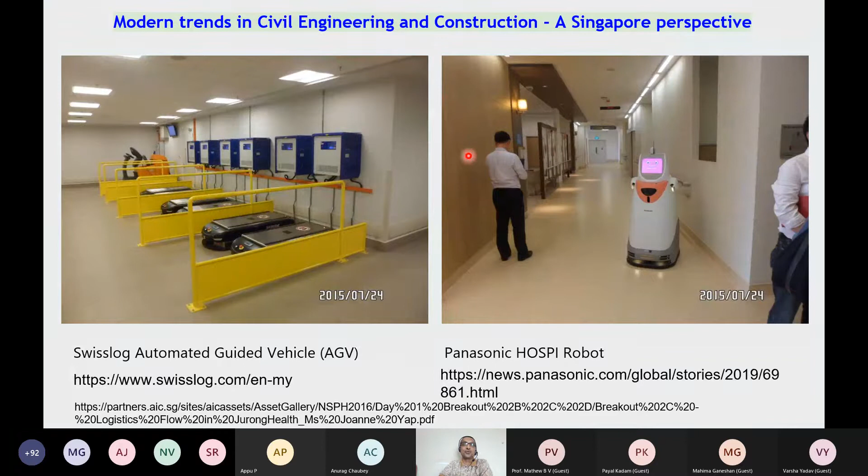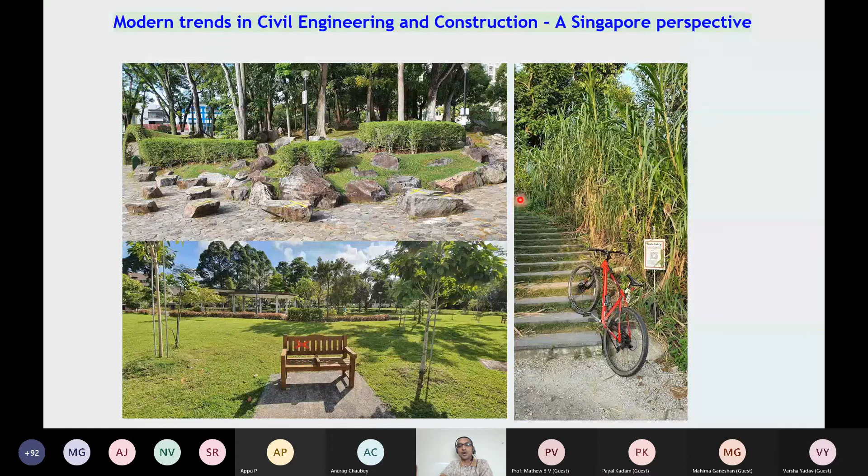So COVID, see now, all these rocks, we could go and sit, but now some rocks are slashed out, I think not visible, for social distancing. Same with this chair: before, 2 people could sit. Now they cannot. So now the capacity planning has to consider this. See, you have to go to the rail corridor, before that check in, have to scan for the entry limit.

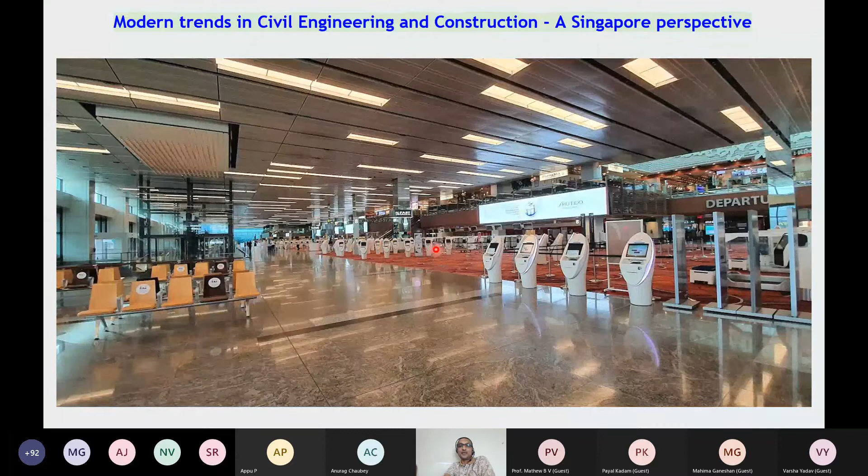Okay, so now we are going to take our journey back to where it came from, the Changi Airport. It is empty. Okay, we have to check in through this automated check-in machine. There is nobody there. The hall is empty.

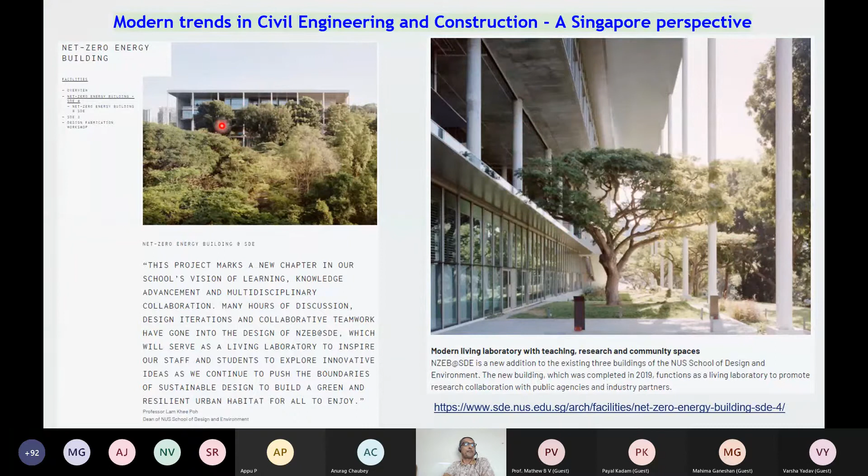Okay, this was my alma mater in Singapore, National University of Singapore. They revamped the whole thing and they made it a zero net energy building. My wish is all our campuses should be remodeled, based on our intellectual brains, so that we can boast of some net zero energy buildings.

Yeah, because I could share all these photos because I walk a lot, I ride, and I take public transport. Google is your best guru and your best assistant as well. Network, LinkedIn. I will be sharing my LinkedIn profile in a moment. And circular economy: reduce, reuse, recycle. COVID strategy: test, trace, vaccinate.